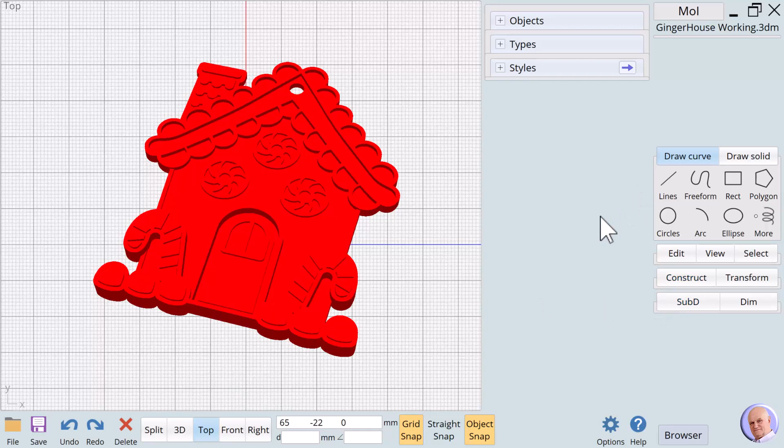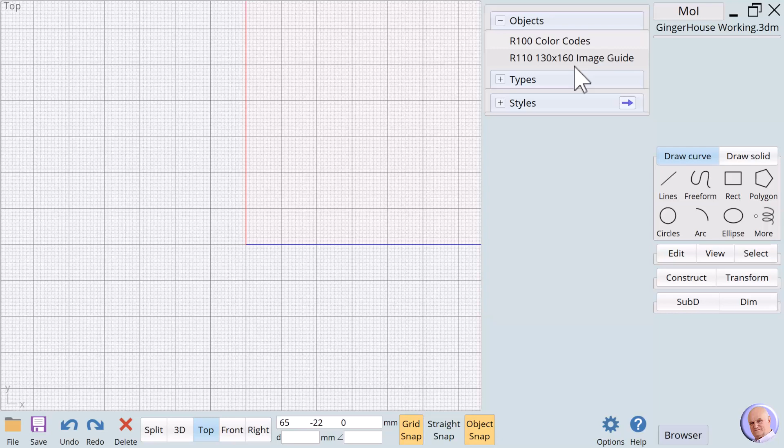But before we do, I'll show you one of the ways that makes it easier to make sure things are centered and easier to work with later. I know my image is 130 by 160. I've worked with it in Affinity Photo, and I've put registration marks on each of the corners that fit in that dimension, so I've created a rectangle that allows me to bring that image in much easier into Moment of Inspiration. Let's go to View, Image.

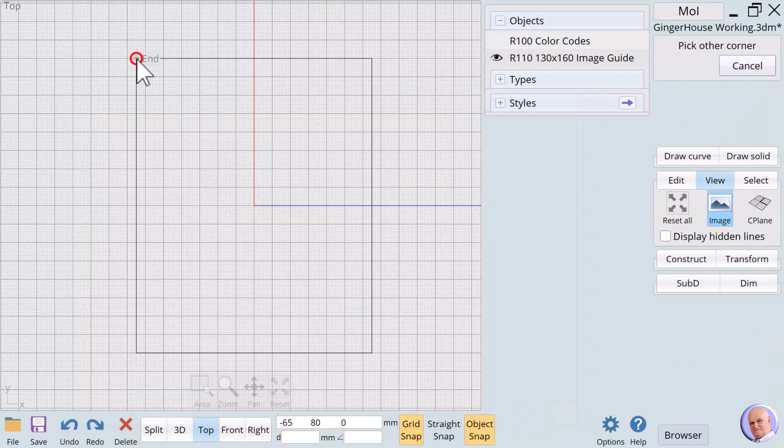We'll first go with the first image that I started with, the gingerbread house. We start in the left corner and come over till we hit the right side. Notice our registration marks show that we're pretty centered here.

This was a black and white clip art. To make it easier to work with in Moment of Inspiration, I colorized it. I analyzed how deeply I want to extrude certain features, and I colorized it to give me a hint as I'm actually designing that.

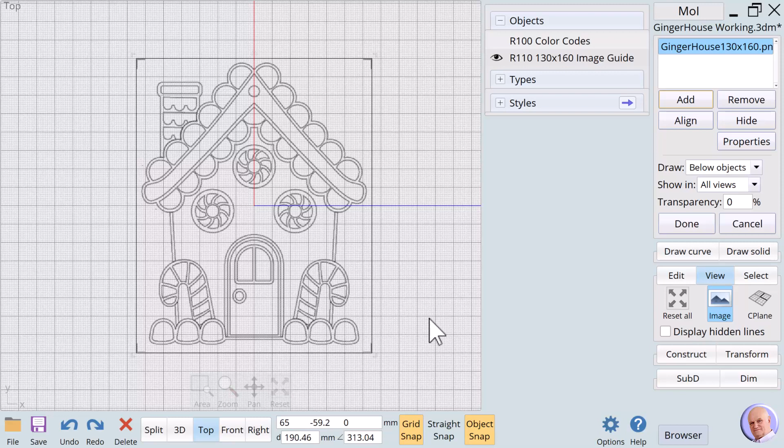So I'm going to hide this one, and I'm going to add another one - this is my colorized image. We'll bring it in and do the very same thing. There we have our colorized image.

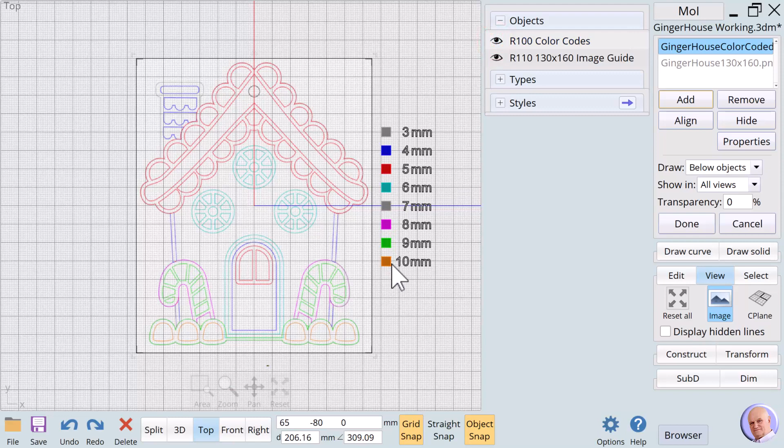And to help me remember what I was thinking when I colorized this, I have these codes. These codes are just there to remind me how deeply I'm going to extrude each of the colors we see on the screen. So let's begin.

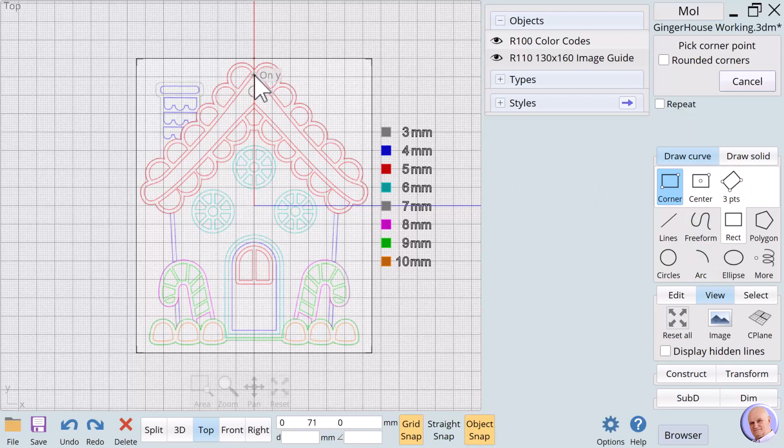The first thing we're going to do is work with the roof, and the roof is a series of circles representing snow. We'll start though with the center part of the roof. I'm going to come up here, let's zoom in on this.

There we go. We're going to use actually 3 points rectangle, and we don't have to be very close here. We just come down and then bring it down here. So the first thing we want to do is contour this part of the roof.

And we do that using show points and add points. Now we're going to make a number of points along this edge here, and they're not going to be corner points. So I'm going to use repeat, and I'm simply going to click on this line 3 or 4 times. I'm going to come around here, do that same thing here, come up here. Don't need quite as many here.

All right, and I'm going to say cancel. Now, the most important thing though, is I'm going to bring this point down, straight down to there. And I'll bring this point up here, and I'll bring this point there. So now we can sort of contour this part of the roof.

Each time I select a point to drag, I click on an empty space of the screen so that I'm not dragging more than one point at a time. All right, that's pretty close. We don't have to be absolutely perfect because the drawing's not perfect - the drawing's kind of a loose form. And we'll get close, that'll be fine.

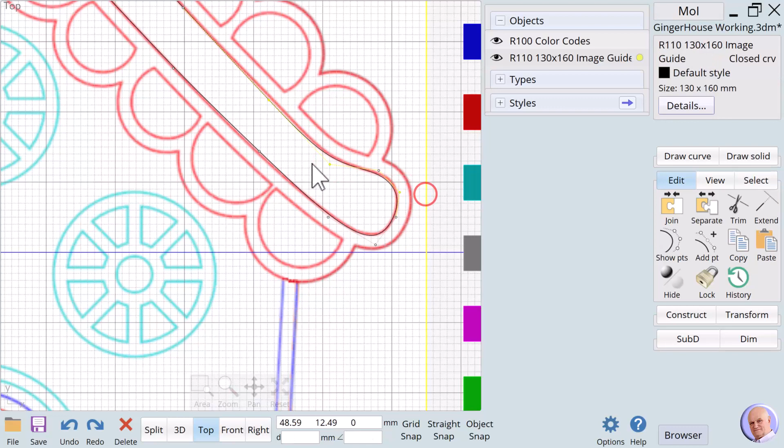That's pretty close. All right. I like that.

So the next thing that we're going to do is we used the rectangle for this form. I'm going to turn off show points, and I'm going to now go to draw curve.

And the best kind of circle to use when you're tracing circles of images is 3 points. So we'll just come up here and you'll see how quickly we can do this: 1, 2, 3. And I'm going to hit repeat to make it fast. All right, and we'll just get these as close as we can.

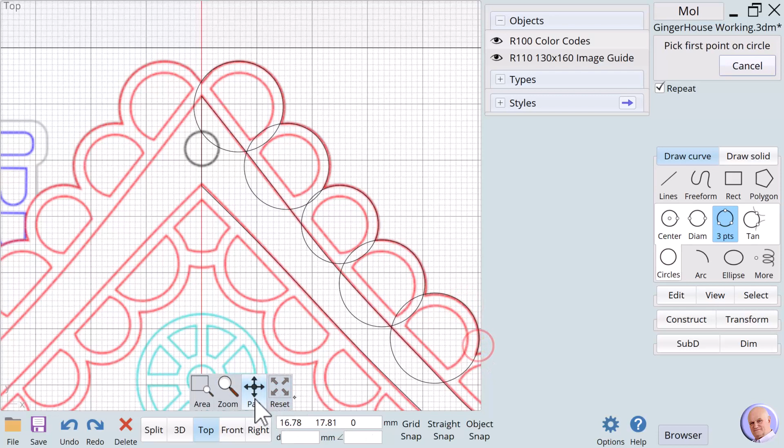And I'm going to undo that - I started in a different place here. So we're going to go back here, hit repeat again. There we go.

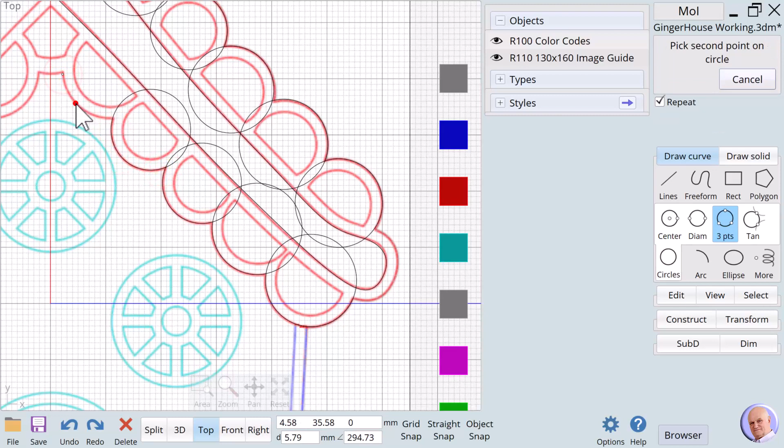Excellent. All right, now the next step that we're going to do is I'm going to pan here, and I'm now going to use offset. And the problem with the offset is you can't use repeat with offset very well because it'll try to offset the same object multiple times.

So I'm going to say done, and 2 - we're going to use a value of 2, and we're going to come down and offset each of these individually and go to the inside.

Come on, inside. There we go. And this is going to create the inside of each of these circles. Make sure we don't select that. There we go.

And we're going to do one more offset, and that's going to be of this shape right here. So we're going to take the offset, and we'll offset that too. Then we're going to take each of these inside circles, just the inside circles, not the outside.

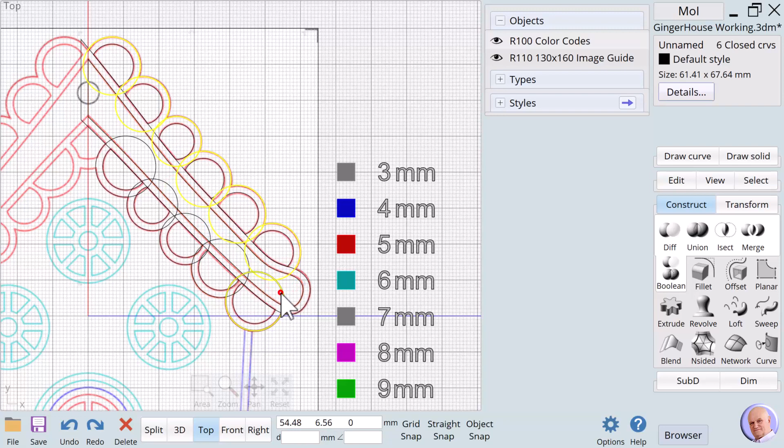Then we're going to come back, and we're going to select all of these outside circles, and this outside shape, and we're going to say Boolean union. Now you'll see that we have all of these shapes that we need here.

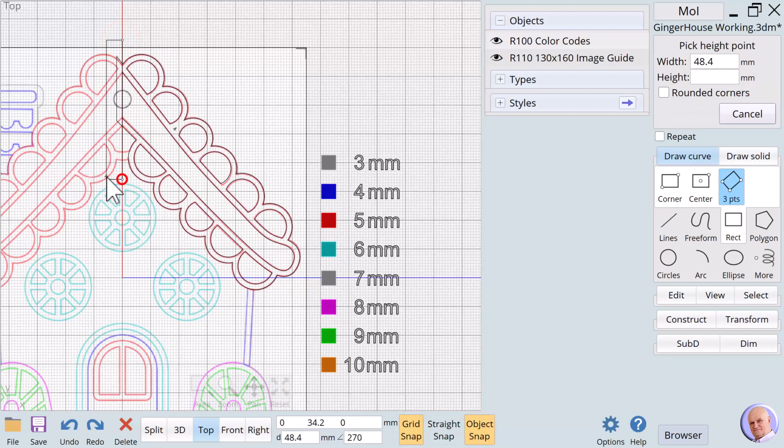I've got one last thing to do. I'm going to come up here, turn on grid snap and object snap, come down, and I'm going to cut this, construct Boolean diff, done. And then we'll delete that.

And now I'm going to transform mirror that side. I'll actually cancel. We're going to transform mirror everything. We're going to select all of these things, and we're going to come over here and do mirror.

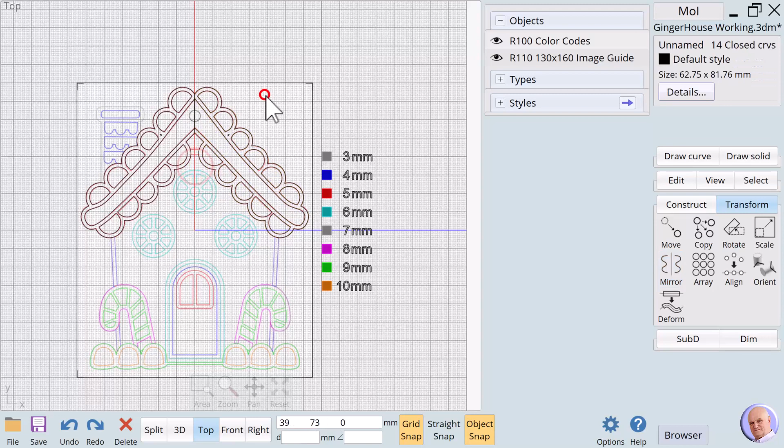And we're going to join two features. We're going to join the inside features, union them, Boolean union. Notice we get that shape. And we're going to take these outside and we're going to union those. So now what we have is an inside and outside. There's one last thing we need to do.

We're going to create this. It's going to be too high. Let's make it 2. There we go. Too high. And just bring it over.

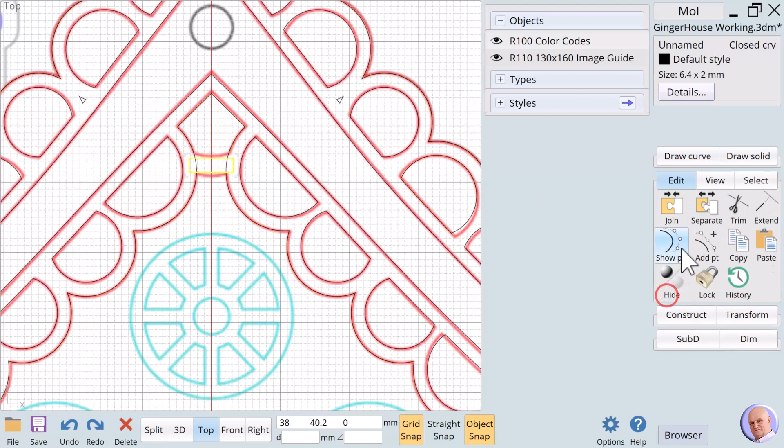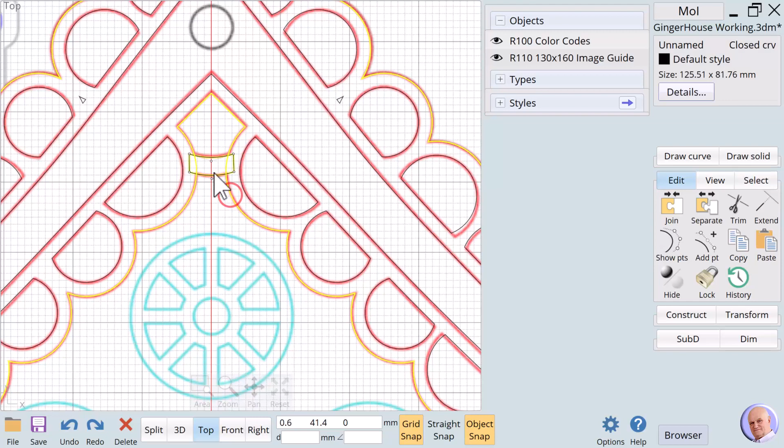Why don't we move these objects up? There we go. And then we'll take this and go construct Boolean union. Now we have our roof.

So right now I'm going to turn off my alignment. I don't need it, so that I can grab all of the roof frames, and we're going to call this R101 roof frames.

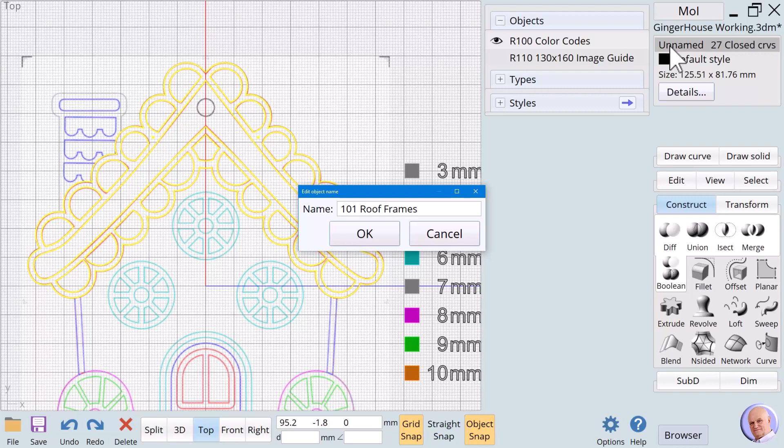And they were red, so according to our color code, they're going to be 5 millimeters. Now what we may do is we may extrude these inside 6 millimeters, depending on what we want to do. But right now we'll just say 5 millimeters, and that will complete our roof.

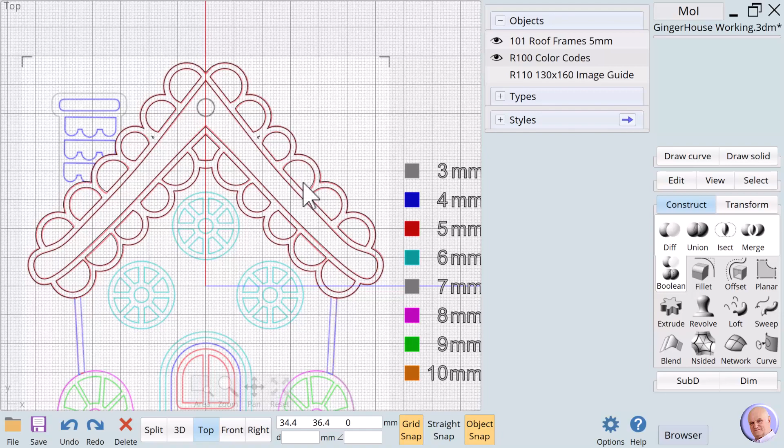We'll now turn our attention to the chimney and to the walls of the house. So for the chimney, we'll start out with a rectangle. Corner rectangle will work well. And we'll start over here, move over, and we'll only come to that far, all right?

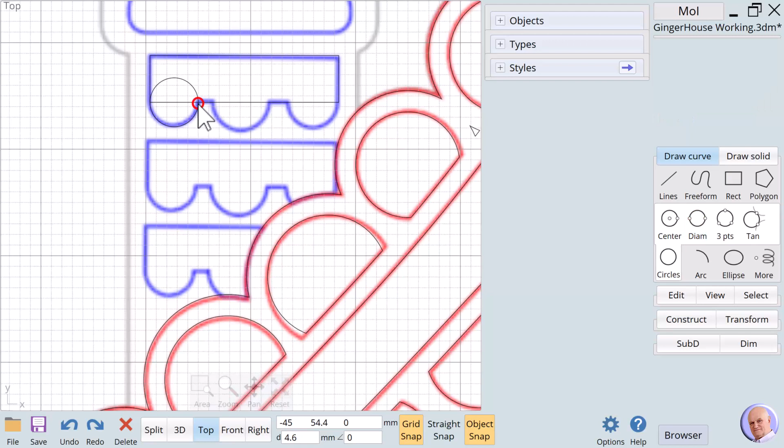But we'll use a diameter circle. Come here, and we will transform mirror, find the center here, done, midway, bring that over, and then we'll come over and put in the next circle that we have. And we'll center this up on the object.

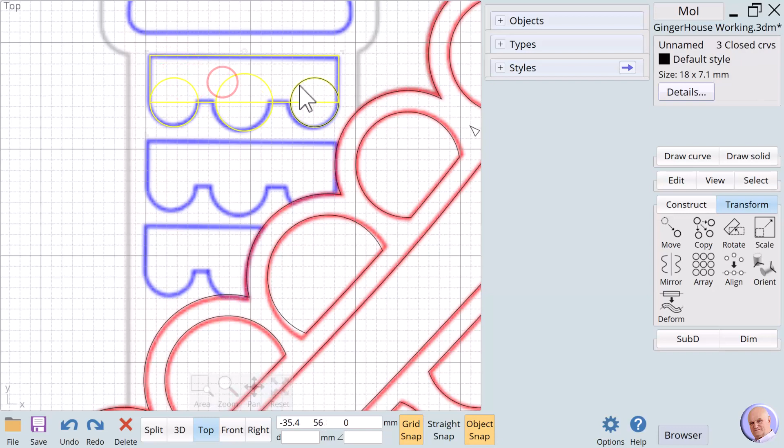There we go. And now we'll union this. Boolean union. There we go. And we need 3 of these, so we'll go ahead and transform array. We'll use the directional array 3.

And we'll start here and come down. Try to keep it as close as possible, straight down. That works. We can make sure they're aligned by going to alignment, vertical center, selecting all 3 and align on the top or the midpoint there.

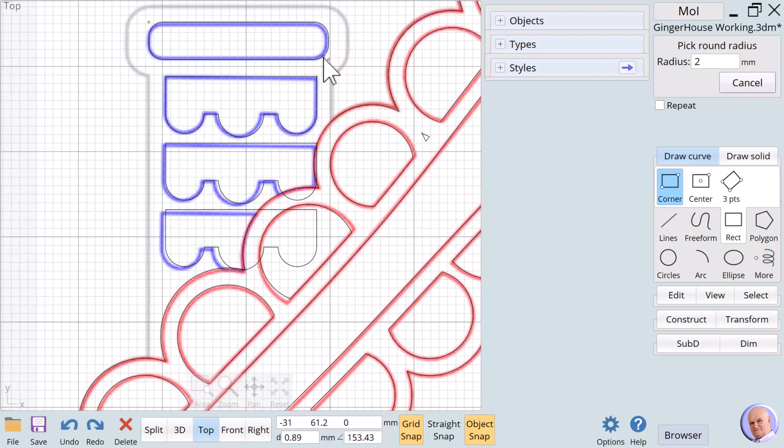And then we will do one more. We use a rounded corners with a corner to corner. And we'll align this after we get it done. The important thing is to do just slight corners here. There we go. And again, because we don't need to be perfectly exact, we'll align it on the mid. So this gives us all of our chimney.

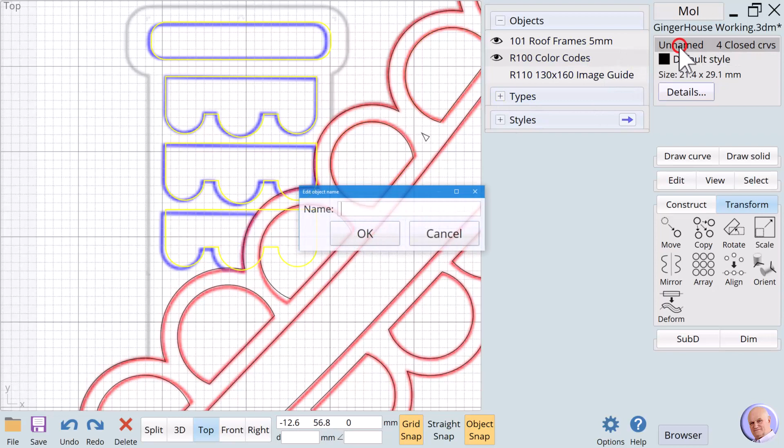The roof was 101, so we're going to use 201 for the chimney. 201 chimney frames, and that's going to be 4 millimeters. I think we said that. We'll back up and look at our key here. Yeah, 4 millimeters for the blue.

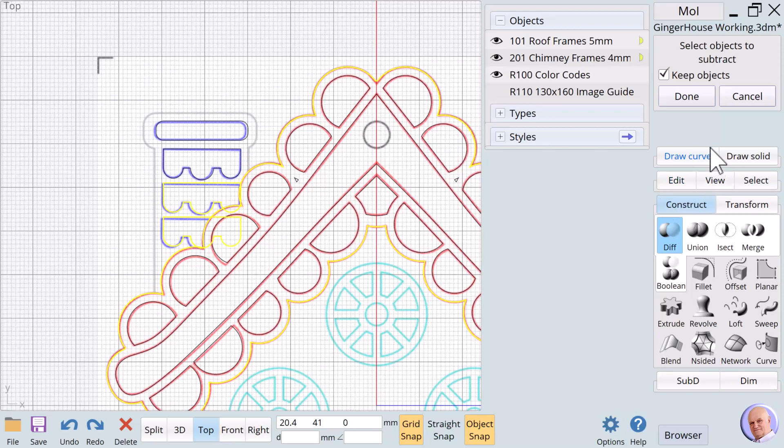Now we do have these areas that need to be cut, and what we'll do is we will select the bottom 2, construct Boolean diff, make sure keep objects, and we'll use the outside edge to trim that off. So we didn't have to draw this shape in here. We'll just use the bottom or the other part to trim that.

And now let's make these walls. The 3-point rectangle will be used here. We'll start at the highest side and we'll turn off grid snap and we'll bring that up. We'll come down and then we'll go over 2.

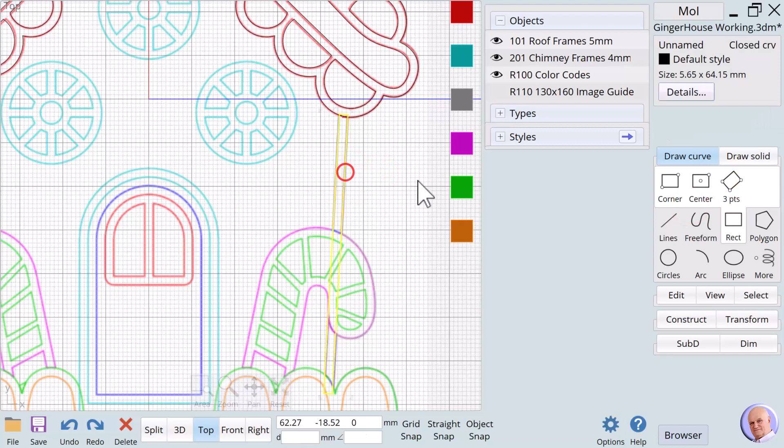Good. And all we'll do here is transform, mirror, and now turn grid snap back on and object snap back on to get the other side.

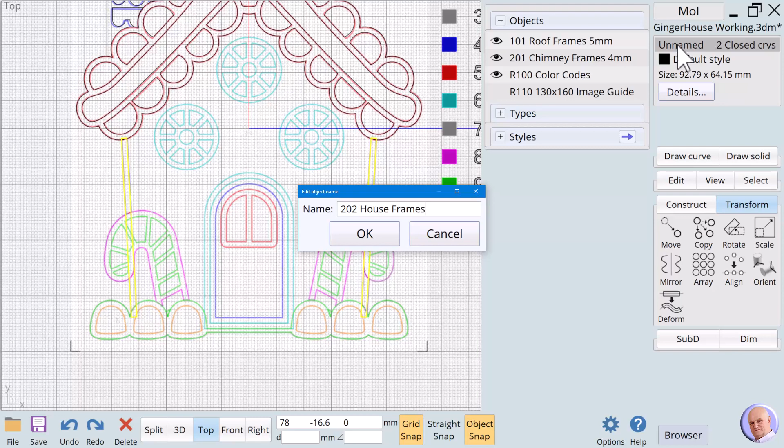And these will be the house frames. Well, because they're blue, why don't we just say here 202, house frames, 4mm. That puts them together, so we'll be able to work.

And we will clean these up by going here, construct Boolean diff, and use that to cut. And now we have the shapes right there. So that'll complete this operation for the blue area, except for the door, and we'll deal with the door separately.

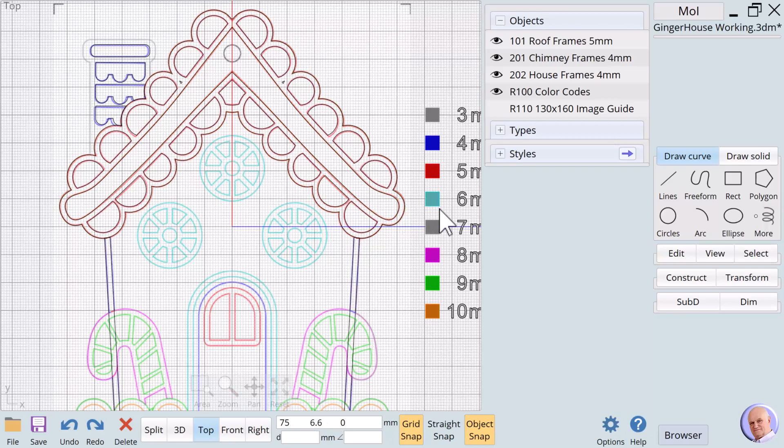The next thing we want to tackle is the windows. And it's going to be cyan. That'll be 6mm extrusion. So let's begin.

We start with our 3-point circle. We'll zoom in, get our 3-point circle. We'll make sure that we center this on the y-axis. There we go. We'll now do our offset, construct offset to, and we pick our offset distance.

Now we're going to go to the center circle, and we'll create this small circle here and a little bit larger circle right here. The next move we make is going to be to create the bars or the wagon wheel look, and we'll do that with a center rectangle.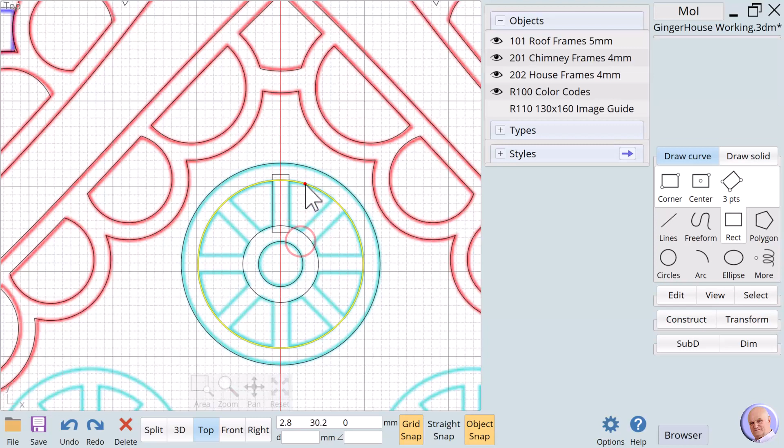We give it a manual width of 2, and then we just make sure we're on either side of the inner circle and the outer circle. We're going to name this ZZ just to make it easier.

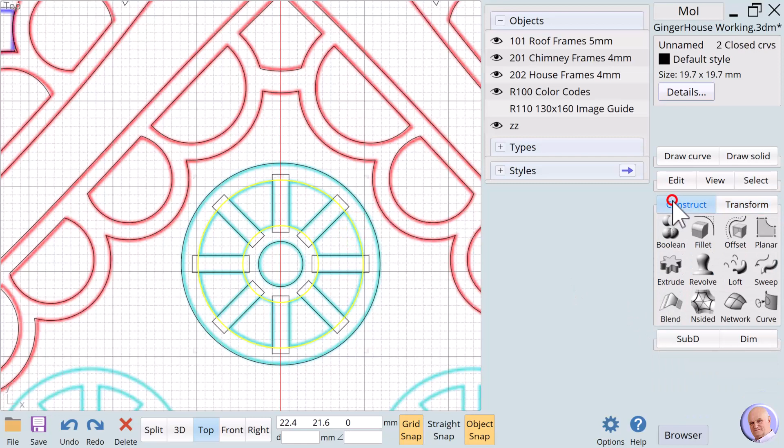In the next move, we'll go to Transform Array, Circular Array, click on our center point, and we have 8 of our wagon wheels. We say done, and now all we're going to do is we're going to select the inner circle, the outer circle, say construct Boolean difference. We'll select all of the rectangles at the same time, turn keep objects off, and our window is done.

To make it a little fancier, however, we're going to select all of the objects that comprise the window and do a show points. We have to get them all. All right, we do edit, show points, and now we're going to add points. We'll use the repeat. What we want to do is we want to put a regular point at the midpoint of every one of these walls.

As we come around, we'll look for the midpoint, and we'll drop a regular control point at the midpoint of each of these. Excellent. And so we'll cancel that.

And now we want to grab all of the control points to the outside. And we can do this several different ways. We can do it individually, or we can drag the mouse to include just the points that we want. And sometimes that's easier than other times, depending on the angle of the points. But we can do this fairly fast. I think we now have all of the points. Be sure to check. Oops, there's one we missed.

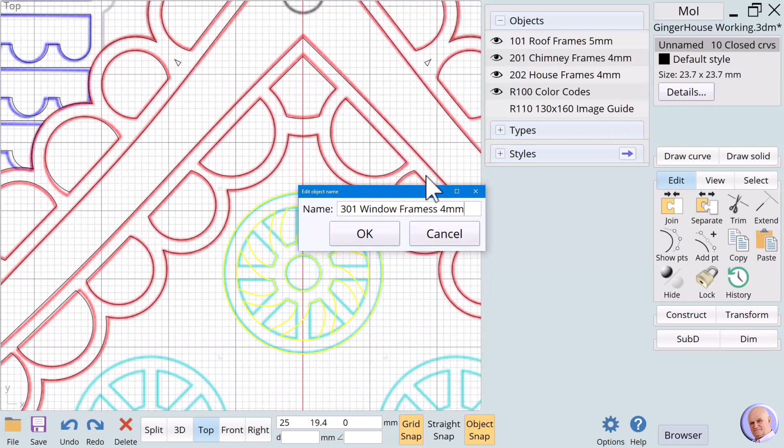We'll now select all of the objects that comprise this. And we'll name it 301, window frames, window frames 4 millimeters. And just to show you what that'll look like, I'm going to go construct, extrude 1. We'll undo this as soon as we've done it, but that's what it's going to look like. Our windows are going to look like this.

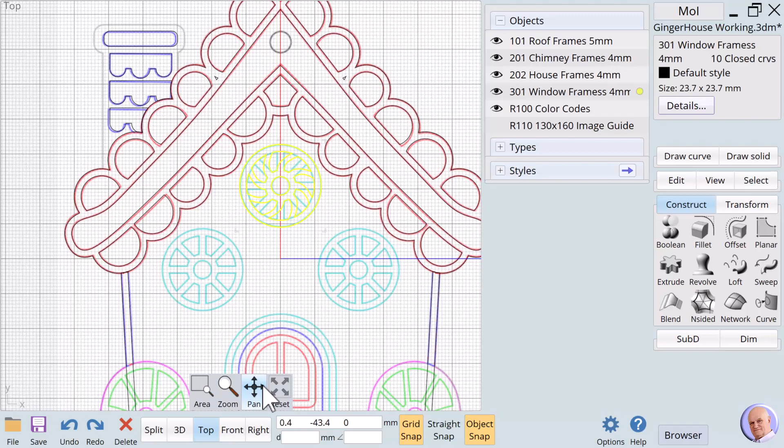And we'll undo, and now we'll move on to the next feature. But before we do, we'll stop because we've taken so much time. We'll break this into 2 pieces.